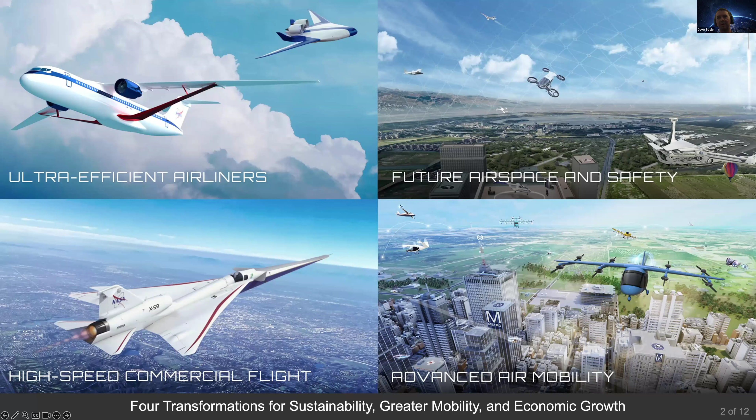Okay, so big picture, NASA Aeronautics. When we talk about mission directorates, I try not to make the focus on NASA's internal structure. That's not really all that interesting and necessary. The point of that really is just to say that NASA has very big, broad missions, and that is aeronautics and various aspects in spacecraft operations, spacecraft development, as well as a science mission directorate. So this is the aeronautics piece, the so-called first A in NASA.

So 4 big picture thrusts, if you will, that NASA has in developing ultra efficient airliners. And so you can see there a rendering of what we have internally called a transonic truss braced wing. This is basically a modern take on the tube and wing aircraft to make it far more efficient than its predecessors. And NASA has recently signed a contract with Boeing to develop what we're terming the X-66A, so an airliner X-plane. Maybe not as exotic as the days of yore when we were doing super high, supersonic lawn darts, but this is the new world of sustainability, of making things more efficient.

Additionally, we have work in the broader integration of more vehicles into an already congested airspace. So the focus there is on digital technologies enabling sort of a future iteration of airspace management, because ultimately air traffic controllers aren't going to be able to manage so much traffic, and they're going to need solutions that help supplement that while maintaining the high level of safety that the U.S. consumer, the flying public, has come to expect.

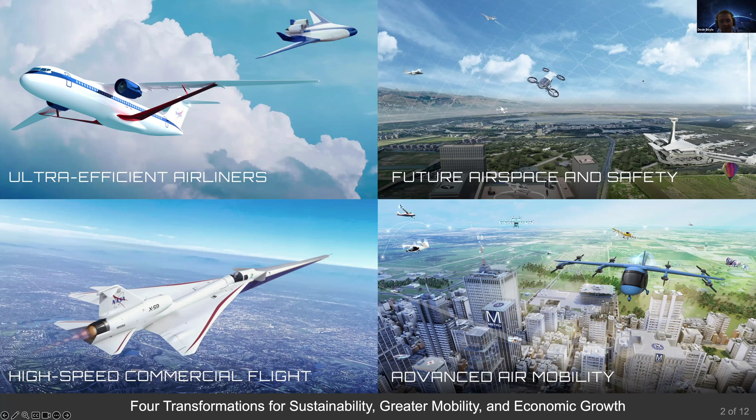So NASA is revisiting this challenge and trying to shape the sonic boom in such a way that it doesn't coalesce and become that really sharp, jolting, disrupting sound that you might hear from a supersonic aircraft. And that could potentially lead to, again, a future market where passenger carrying airlines are able to much more quickly traverse the continental United States and beyond.

And so finally here with advanced air mobility. So this is a very, very broad topic, as I'm sure you know. This encompasses everything from the vehicle level, for which my project has a focus, to the infrastructure, where and how are these things going to operate in the environment in which they're intended to operate, and then the airspace, right? And so there are a total of 7 NASA projects that cover this realm of advanced air mobility. And as I said, our focus varies from the vehicle itself all the way up to operationally, how are you going to use these things and operate them safely in an already congested airspace.

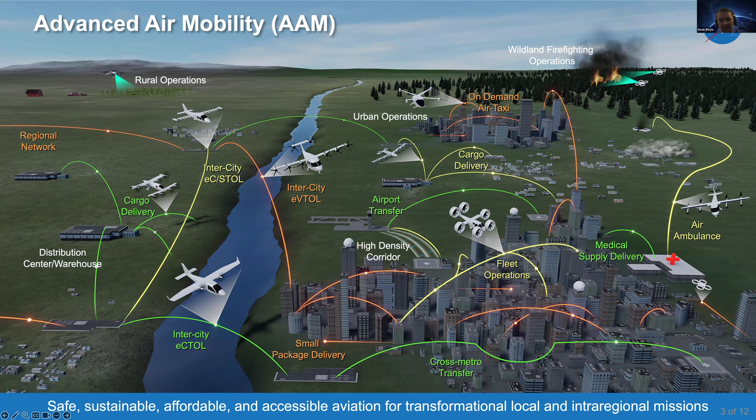So, you know, there really are again a lot of unique and new opportunities availing themselves with these new vehicle designs. So that's great, but it comes with a caveat, right? We love the innovation. We love this sort of disruptive market and the potential that comes with it. But the caveat really is that we need to implement this in a way that is safe, efficient, and is not affecting the non-flying public or the non-participating members of the public.

And so in that vein, again, digging down now further to the project that I represent, the focus from here on out will be on the vehicle itself and what NASA's role is and what we're doing to ensure that these vehicles are going to be operating safely, quietly, efficiently.

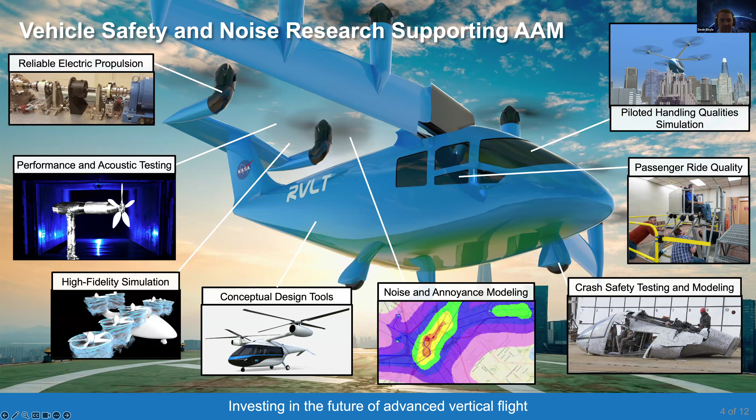And so in that vein, we have a number of different research areas within our project focusing on those very aspects of vehicles. And again, this is now the subset, particularly of what we call UAM, or this sort of 4 to 6 passenger, people carrying, human rated type vehicles. The vast majority of them are expected to be vertical takeoff and landing capable, and either fully or partially electrified as in a hybrid configuration. And so this is just a snapshot of all these, and I'm now gonna kind of dive a little bit deeper into each one.

Okay, so the first one I want to talk about is the motor or the powertrain and power distribution system itself. It's certainly true that what we call distributed electric propulsion has enabled inherent redundancy, right? So now you don't have a helicopter with a single main rotor and maybe 2 engines. Now you have 6, 8, 10 rotor systems that each have their own propulsor. So that's great. This electrification has enabled redundancy just on the basis of distributing propulsors all over the aircraft. But that is not where we stop and declare success. These things can and do still fail, and that causes controllability issues, certainly passenger comfort and acceptability issues.

And so we're implementing research to take this a step further and improve the reliability of the propulsor itself, and have built up facilities to that end. So NASA research now is looking at motor architectures, electric machine architectures that have internal fault tolerance and actually have sort of internal redundancy within a motor, not just saying I have 10 motors on this aircraft, it doesn't matter if one fails. So pushing that state of the art and improving the reliability of the motor itself, of the propulsor itself, is one of the major ways in which NASA research is helping to push the state of the art and improve safety of the overall vehicle.

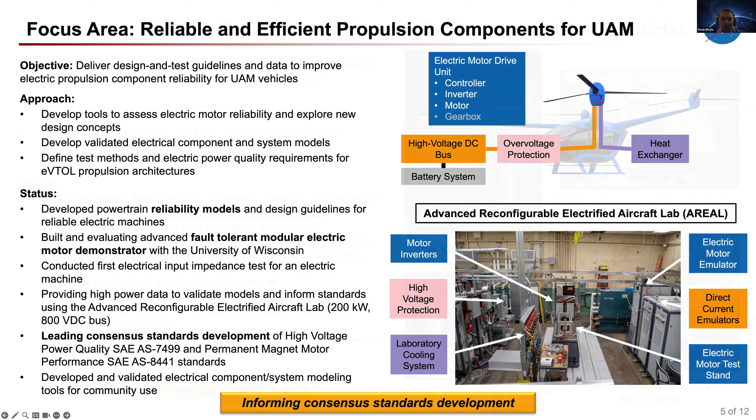So in addition to the safety issue, noise is a major concern, and Johnny alluded at least a little bit to my background, coming from acoustics and from a propulsion flight test background. I'm happy to see this is a front and center issue with this new market of aircraft, because historically we've developed aircraft that were typically incredibly loud, and we only subsequently came up with band-aid solutions over decades of research to make, for instance, fan and jet noise on turbofan engines quieter. And we continue to this day to work on those problems because the non-flying public, the people beneath these flight paths, have to deal with this on a daily basis.

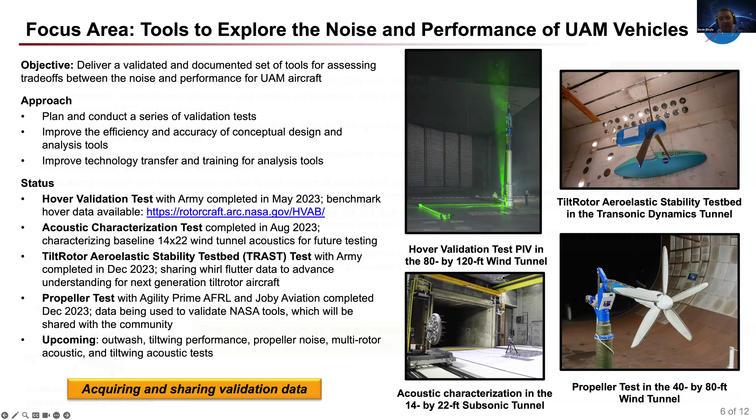And in addition to that, taking it a step further, we have a component of high fidelity tools as well. Again, digging deeper in that design chain from very broad conceptual design into a more detailed design analysis of various designs that vehicle manufacturers may be interested in pursuing.

Okay, so again, sticking with that theme of noise, we've also got researchers focusing on assessing fleet noise. And again, this is not just a single vehicle, but now operationally, if these things want to have high density operations, what is that going to look like, and how are these going to affect people?

Some great anecdotes here. The current state of the art of vehicles, and I certainly can't name any names of vehicle manufacturers, but these aircraft are already significantly quieter than traditional rotorcraft in their operations. The issue comes into play when you consider how they generate noise. One of the major challenges is that these vehicles have many rotors, and those rotors all generate their own tones, and then there are interaction tones. Humans have a natural aversion to tone noise.

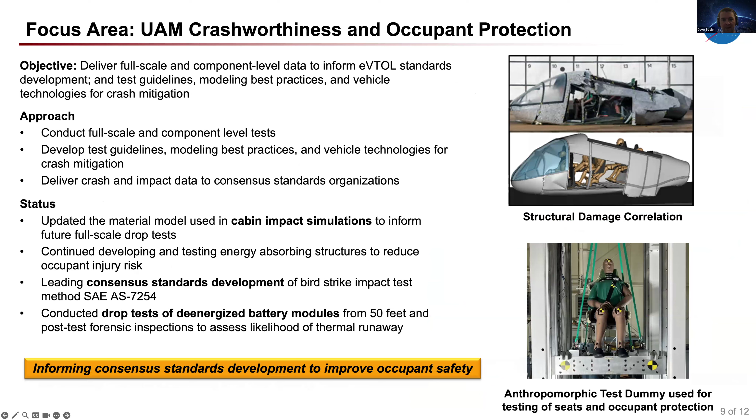So on to ride and handling qualities. Ride qualities you can think of as a passenger issue. Handling qualities being a piloted aircraft, pilot-centric focus. And so our groups, again, developing recommendations and standards, but also developing a set of tools and validated data sets to enable manufacturers to build vehicles that are going to be safer to operate for the pilots, with respect to very complicated control systems. No matter how you approach your control system, with a cyclic or collective like a helicopter, or with variable RPM control, the issue pertains to the fact that you have 6, 8, or 10 controlling rotor systems rather than a single main rotor now.

I like to characterize these vehicles as sort of jittery compared to helicopters, because they have so many different rotors that have very quick responses, thanks in part to their electrified propulsors. They can respond much more quickly, and so the vehicle dynamics are very different than how helicopters operate. And so our teams are trying to understand this, trying to quantify it, and build tools that help build these things to be smoother, safer, more effective at controllability.

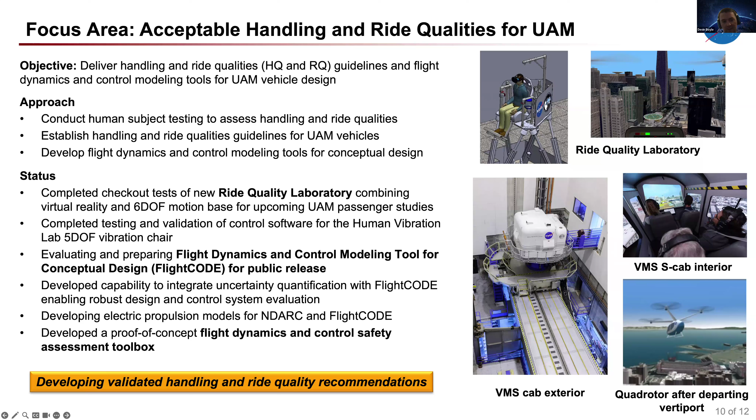So bringing it all together, I alluded to this already, but the research that we do is not just serving private companies who are building air taxis for large urban environments. There really are many opportunities for what we term public good missions and applications that were once not economically viable with the electrification of aircraft, either fully electrified or hybrid. And the sky's the limit.

We continue to see companies dreaming up new use cases for missions, like the one I alluded to, where a private company is looking at a rural first responder mission with a small electrified vertical takeoff and landing aircraft. So again, there are so many opportunities now that are being enabled, and the research that we're doing is really helping to make the broader industry have the tools they need to make the vehicles safer, quieter, more efficient. That's my elevator line there.

And then I think that's pretty much it. Just coming back to the NASA aeronautics focus, and then RVLT, a subset of that, advanced air mobility research being particularly focused on the vehicle itself. And then NASA has many other projects that are focused on challenges with operations, infrastructure, airspace, communications. And that's it.

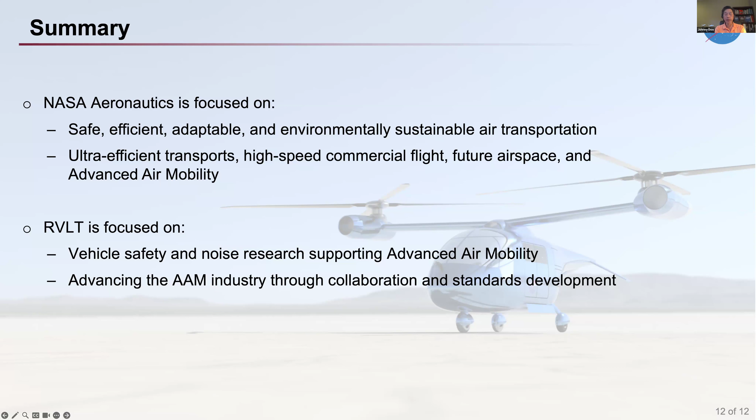Hey, Devin, while folks are thinking about questions, I do have one. You were talking about it not being just a simple equation of the decibel readings of a particular type of vehicle, like the eVTOL may be already significantly quieter from the data perspective than the traditional helicopter vertical flight machines. But I'm thinking about one of your charts showing that if an urban air mobility air taxi business is in place, dozens or hundreds of flights per day from some selected vertiports.

In your view, feel free to guess, you don't quite have the full answer yet, would it be better off in some cases to fly a fixed path so that folks who live under the flight path got used to that noise, like what you talk about? They felt the drone is more annoying than the truck. If we brainwash them over the next 6 months or a year, are they going to get brainwashed? And if we fly everywhere, dynamic AI-based flight route planning, avoid repeated routes, is it worse? Which is better? This is a great question.

And so you may have heard this anecdote. We participate in NASA's acoustics technical working group, and there's now a spin-off of that, the Urban Air Mobility Noise Working Group, whose focus, as the name implies, is on electrified vehicle noise. We have a large Class Bravo major commercial airport noise manager that comes to these meetings, and her statement was, we have 1,600 noise complaints a year, and 1,200 of them come from 2 people. So we're not going to please everyone. It's just the reality that there will be people that cannot be placated.

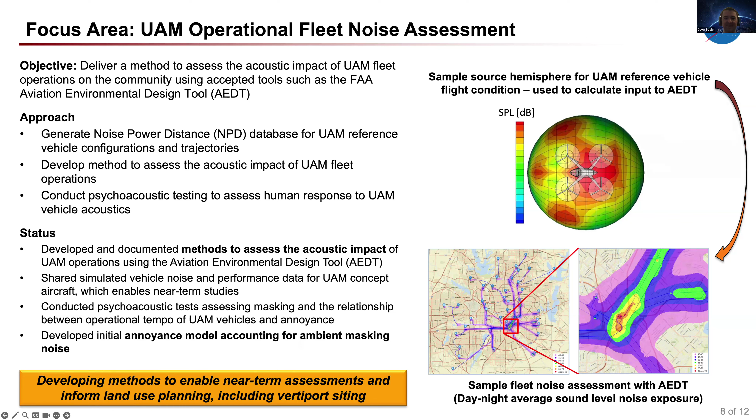And that's actually why our focus has been on component level tests. What's not pictured here are some of our multi-rotor tests that we've done and continue to do, again, to try to understand the physics of the interaction noise that occurs, and how some of those parametric variations of placement of rotors with respect to each other, with respect to the structure, affect noise generation.

Sounds challenging. I'm glad that you guys are on it, along with many other industry efforts and university efforts. So this is great. I really thank you for the presentation, because it gives us an across-the-board look at NASA's multifaceted effort in all related fields. Sometimes we talk to a specific branch and we get specific focuses. That's why I love your presentation very much, because it gives us a broader, better understanding of the different efforts in different areas. So it's good to know.

It's good to know our tax dollars are at work in the right place. Hopefully you're getting a bang for your buck, or less bang, a quieter bang.

And again, when you say specific focus, this still only represents one of 7 projects across NASA that are tied to the activities under the umbrella of advanced air mobility. So it's quite an enormous task. Again, this sort of disruptive industry, and all of the different discipline groups that it affects, and all the different entities, the public, the local and state governments, and people that need to become stakeholders to make this thing a reality and be accepted broadly.